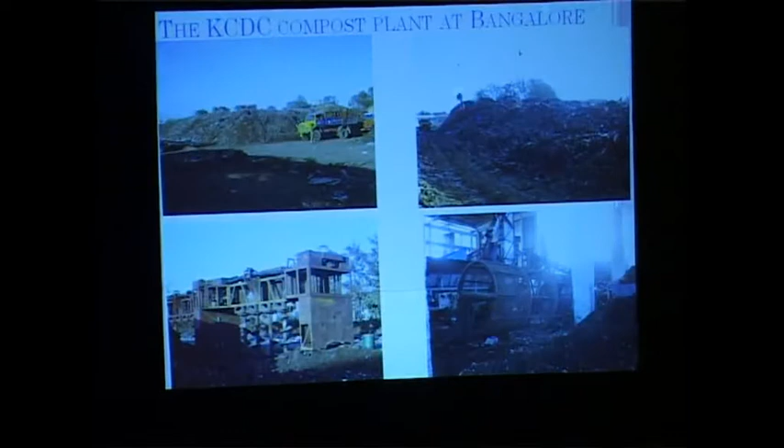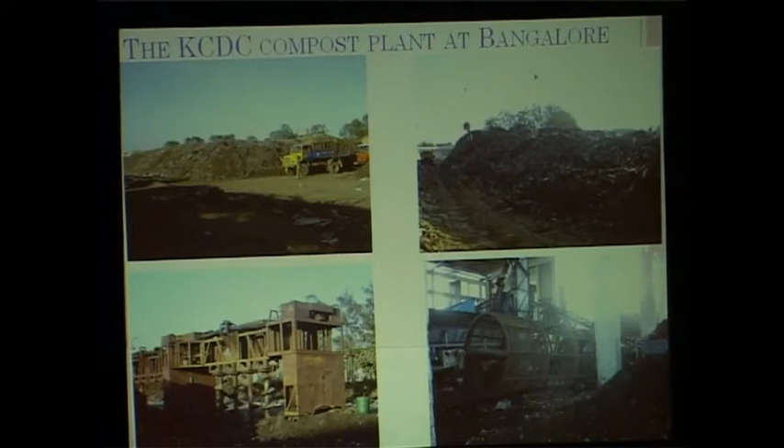Now, this is KCDC in Bangalore. This is one of the oldest plants, which closed down about 3 years back because of odor issues. But look at the high wear and tear and corrosion of the equipment. All these things break down and they don't have enough money to replace it. So they continue with such windrows which are as high as a truck, and obviously it causes odor.

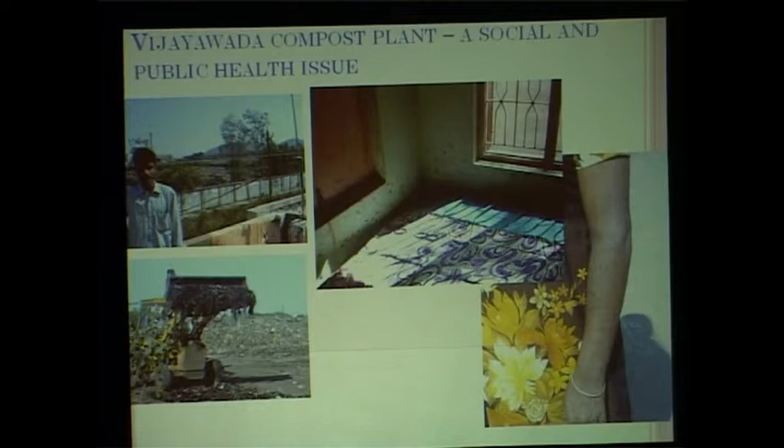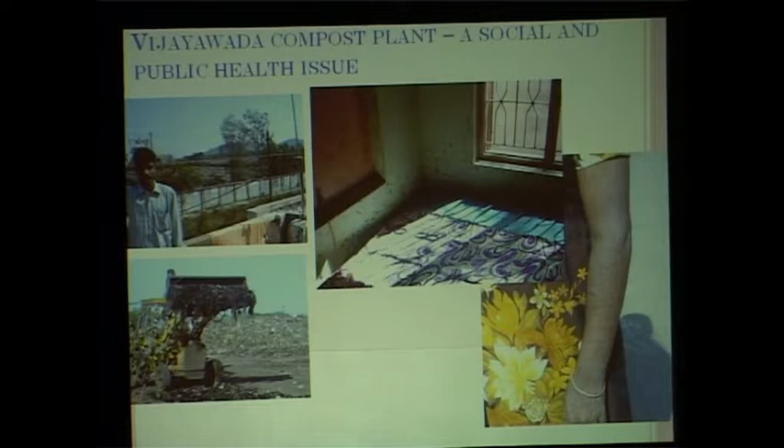This is the Vijayawada plant. The issue was on location. What came first? Whether the plant came first or the colony, the residents, and the land use planning aspect of it. And therefore these guys are living 24/7 in an odor envelope. And this girl has developed skin infections, and look at the flies in the house. This is all across the road. The pressure from these guys led to closure of the plant, besides of course financial unviability of the whole project. So these are some of the inherent technological, locational, environmental, social risk factors.

Now I will focus on the post-production thing. You see, if you are producing compost from mixed municipal solid waste, there are toxins, there are heavy metals in it. Then there are antibiotics, pathogens, and weed seeds in it. Sharps, glass, crockery, needles, they are there. So the farmer is not comfortable using this for his field application. And he says, I had better use some other thing rather than this. He's not ready to pay a price for it.

Then you have low nutrient value, then you have low shelf life, and then you see, you are producing compost 365 days in a year. But compost application on the field is only 3 times in a year before sowing. So the producer is left with very high stock. Inventory is very high and he has to carry the cost. And with low shelf life, there is degeneration in the quality of the compost. So eventually, you are left with humus only. There is no manure, there is no nutrient there.

And then finally, for the last 10, 12 years, we are hearing the compost sells for only 2,000 rupees per metric ton. Even now it is the same thing. There is no indexing with inflation. The diesel rates have gone up, salaries have gone up, but my guy is still producing at the same rate and same quality. So where is the viability of that guy? He's not getting any tipping fee from the municipality. I'm finally coming down to tipping fee.

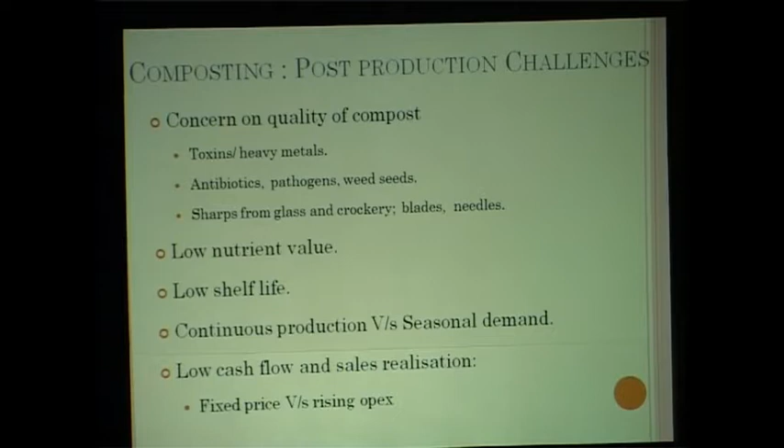Now, I think we can skip this anaerobic digestion, but I will tell you that anaerobic digestion is far too difficult. Already I have told you, from the cost point of view, it is 10 times more expensive than a compost plant. So why would anybody in his good judgment go for something as expensive as that and assume that the return on investment will be proportionately 10 times higher? Simply not possible, because it's the same quantity and quality of feedstock. I cannot treat the same material with X, Y, and Z technologies and assume different returns. It can be at best 5 or 10% plus minus.

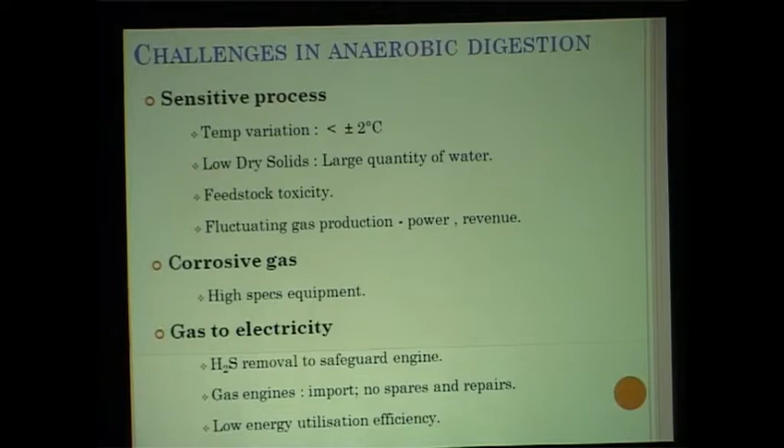So let's skip this, but I want to tell you something very important: if you're burning garbage, or if you're producing biogas, whatever electricity comes out is only 25 to 27%. When you burn petrol, how much goes to your wheel? Only 25%. 50 to 60% goes into your radiator. All right? And the rest are losses and running of the system.

So in Europe, or in cold climate countries, what they do is combined heat and power, also called cogeneration. They will take this 35%, make it into hot water and supply it into a district heating system. And they will charge for it, so they make money out of it. So you have 35 and 25, you are pretty close to about 60. And there, it's very remunerative or viable. But in the Indian context, where heat is too much outside as well as inside, it's too difficult to capitalize on the waste heat. So fundamentally, if you don't do that, you are only running at about 25% or even less.

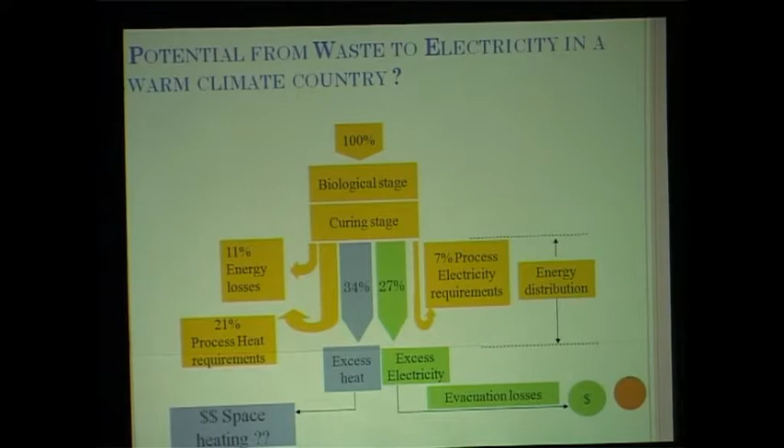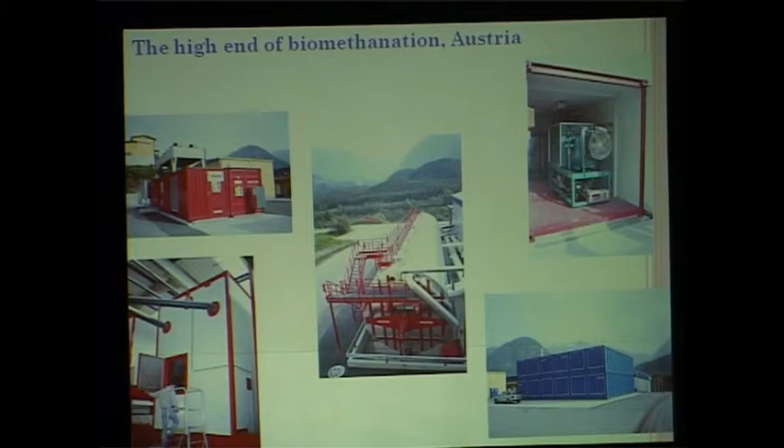And here, this one on the right, the blue one, this is a biofilter. This is for odor control. Look at the footprint of this versus the car over there. This is as big as that. We have to take care if you don't want to make eligible bachelors ineligible. And that costs money in terms of capex and opex. A lot of energy goes into cleaning of the air. But we are not doing that.

Now, finally, quickly, this is a large-scale biogas plant in Lucknow, which closed down in 6 months flat, which was constructed at 76 crore rupees.

Ambitiously, it was built for 5 megawatts of electricity, whereas this on the right is a small 5 ton per day plant, no great ambition on power generation. It was purely from a livelihood point of view. It was working for 2, 3, 4 years. It worked. BARC gave some grant also, Bhabha Atomic Research Center. And these workers were the owners, and they were doing very well. But unfortunately, they also faced problems, because when the grant stopped, they could not sustain the operations.

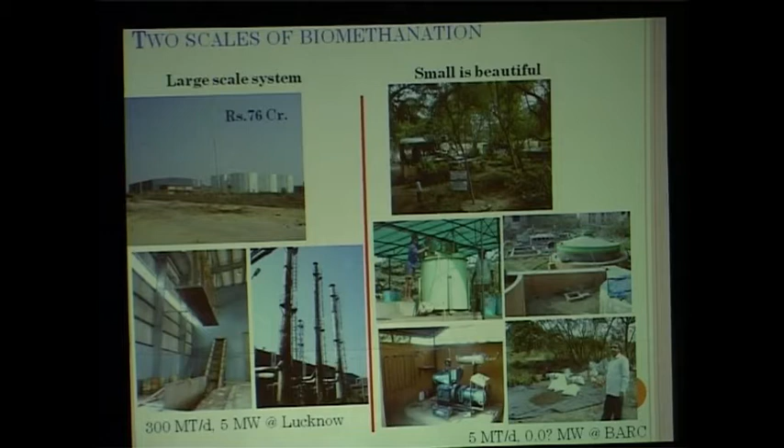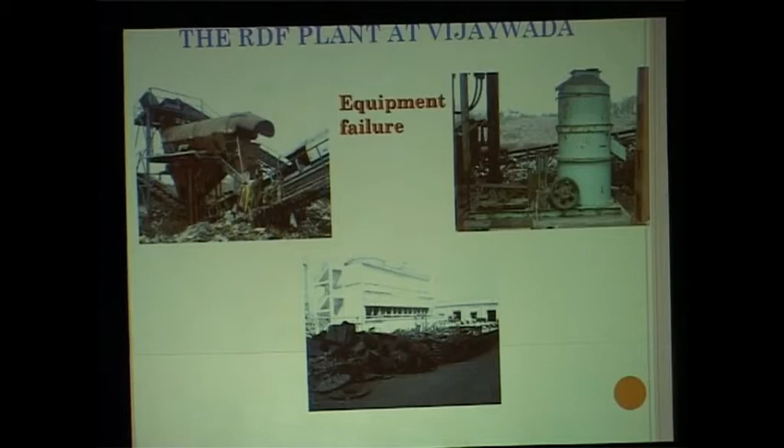All right. So challenges in RDF, I think photographs will show you very well. Very high mortality rate, corrosion, wear and tear, and then there is the biggest problem. Garbage is coming free to my plant if I am an operator. But if calorific value is low, I have to blend it with rice straw and wood, which is costing me something like 2,000 rupees per metric ton. That was not factored in my financial model in the beginning. So my financial model goes for a six.

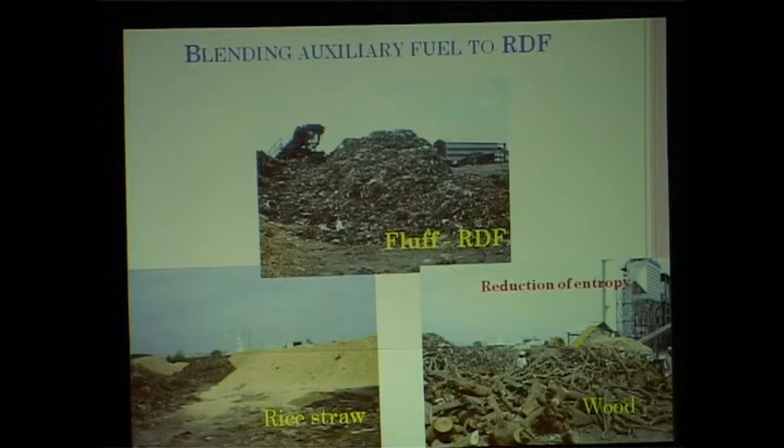Now finally, when you are composting, a single stage, two-stage process, my efficiency is about 60%. If it is a three-stage process, my efficiency is around 17%. And mass burn, my efficiency is about 22 to 23 or 25%. Because there is a simple rule in our mathematics that efficiency of the system is a product of the individual components. So based on that, I work that out.

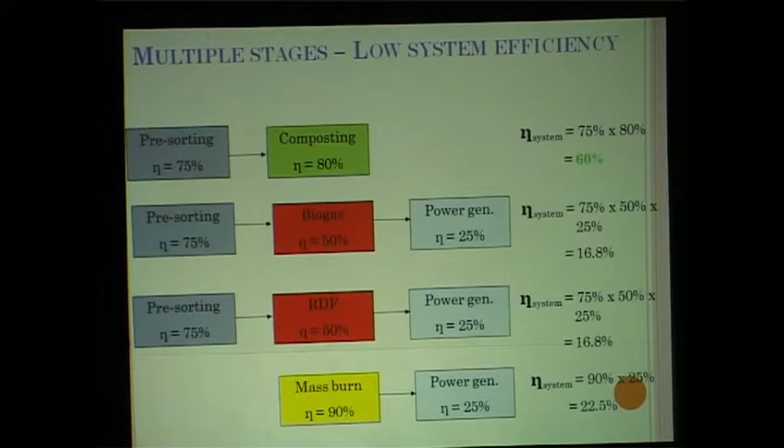So composting is offering me good efficiency, but it has its own challenges. Mass burn is offering me pretty good efficiency, but it has its own challenges. They don't sustain on their own. They have to be sustained by giving a robust tipping fee, which in the international market is in the range of $100 to $200 per metric ton. Whereas here we are not offering any tipping fee. Instead, in many cases, municipalities expect some royalty from the operator. So reverse is not possible, because taking it to the philosophical level,

the bottom line of challenges for all these things is the second law of thermodynamics. This is called the law of entropy, or the law of madness, or the law of disorder. You have a very high level of disorder in the feedstock, in the entire system. There are too many challenges with respect to collection, transport, treatment, delivery. Then your money is stuck. Then there are many issues on the institutional side. So what to talk of a simple plant working consistently? It's not possible. Anything that can go wrong will go wrong. That's Murphy's law. And that is why the slide in the beginning had too many reds out there.

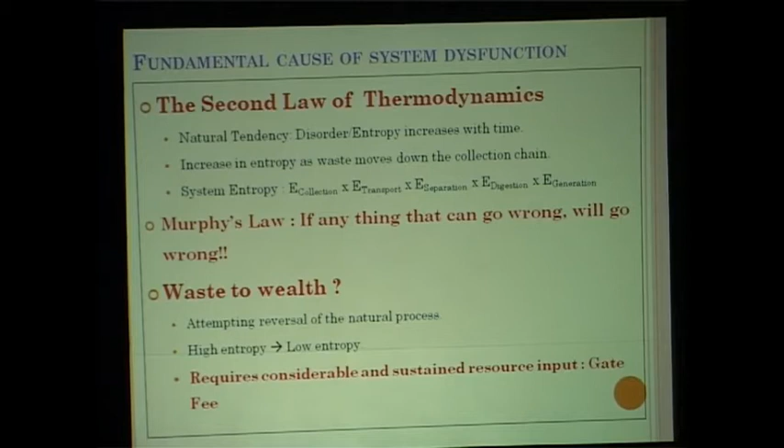Waste to wealth is a difficult proposition in this context. Waste to wealth is actually waste of wealth, if you really want to look at it from a project investor point of view. Waste to energy is waste of energy. They are incidental. Don't expect that that itself will sustain my operations. And it requires a considerable gate fee or tipping fee, as he mentioned.

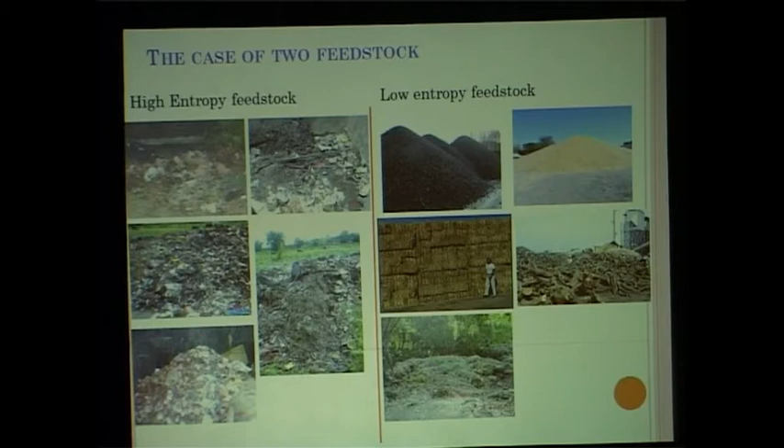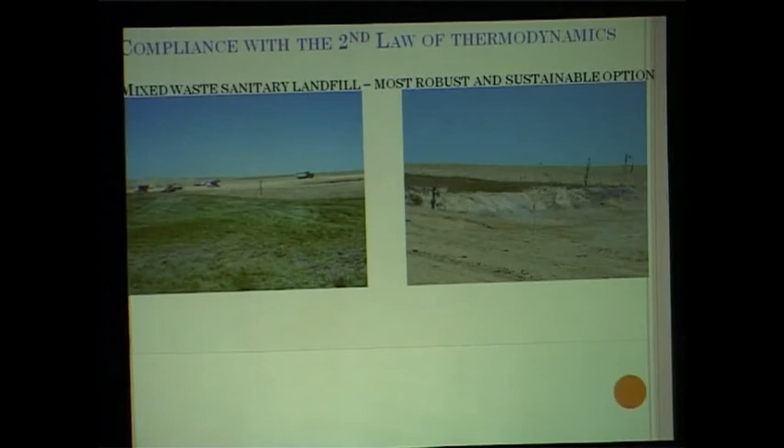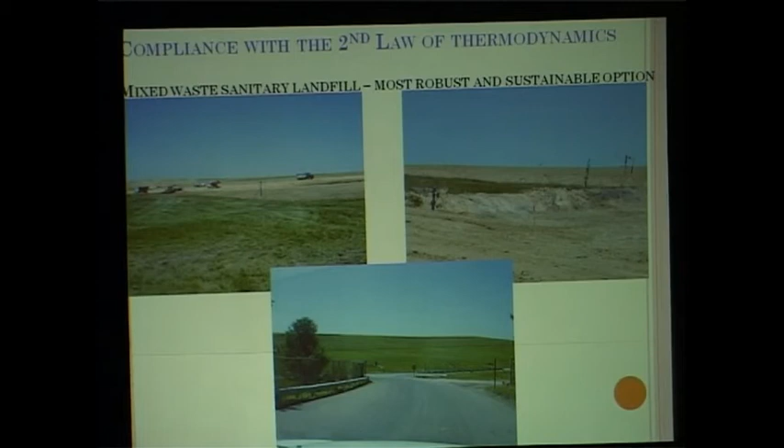Look at this, on the left over there you have feedstock with high entropy, and on this you have uniform feedstock with very low entropy. This can work very well, but that is far too challenging. Okay, and this is how they comply with the second law of thermodynamics by landfill. And this is why I want to say that this is landfill. Those of you who have been using landfill for open dump, I'm sorry, that is not. This is landfill. All the energy that has gone into compaction, covering, etc., and that is giving me safeguards for public health from viruses and bacteria.

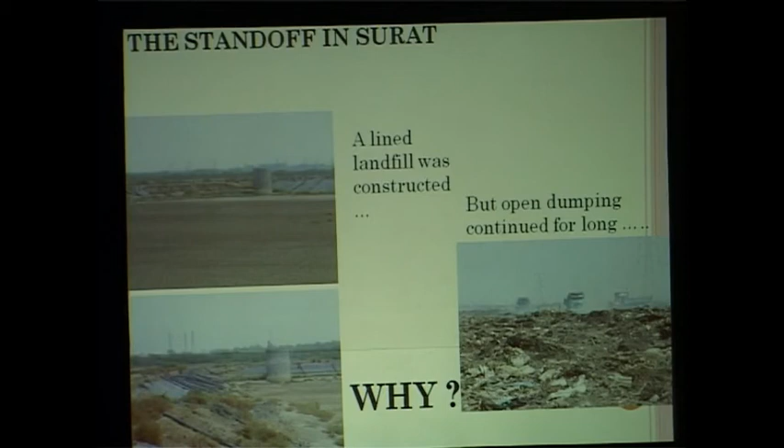So this brings me to the end of my presentation. I'll show you a contrasting situation. In Surat, about 7 years back, they constructed a landfill, but MSW rules did not allow disposal of mixed garbage into landfill. So they were disposing it openly, and the landfill was left unused. So every year it was getting damaged by the monsoon. So there are issues with value addition. We have already spoken about intangibles being the primary output, and MSW rules require revision. Don't expect source segregation. That will never happen.

For the next 10, 15, 20 years, we cannot... it will not happen. Just the second last point. Allow organics to the landfill. Don't think that organics is an anathema for landfill. It has to be disposed. As Dr. Patrick said, landfill gas harvesting is possible when you are dispose organics into the landfill. And public health is most important against resource recovery. So thank you very much.